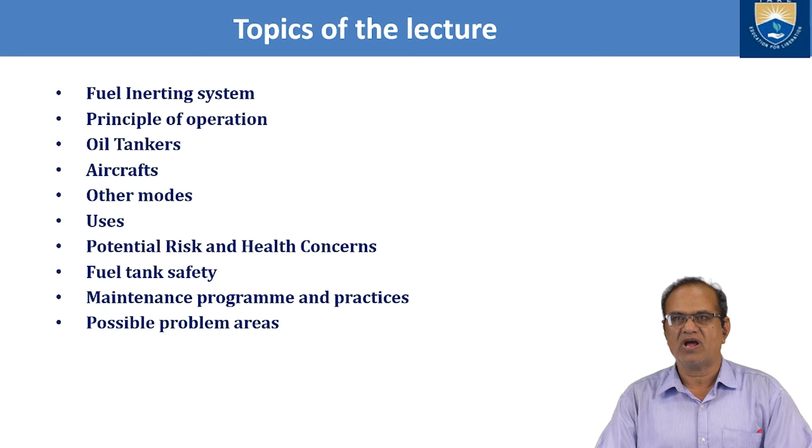In my today's topic, I have the Fuel Inerting System, principles of operation, oil tankers, aircraft, other modes, uses of inerting system, potential risk and health concerns, fuel tank safety, maintenance program and practices, and possible problem areas.

So what is the fuel inerting system? An inerting system decreases the probability of combustion of flammable material stored in a confined space. The most common such system is a fuel tank containing a combustible liquid such as gasoline, diesel fuel, aviation fuel, jet fuel or rocket propellant. After being fully filled and during use, there is a space above the fuel called the ullage. Ullage or head space is the unfilled space in the container, particularly with liquid.

So what is the ullage? If you see, this is the tank here, and here is your filling point, and if you are filled up to here, this part which is filled with air is called the ullage. This space is the ullage or the head space, the unfilled space in a container, particularly with liquid, and here is your fuel.

So that contains evaporated fuel mixed with air, which contains the oxygen necessary for combustion. Under the right condition, this mixture can ignite, and an inerting system replaces the air with inert gas such as nitrogen, which cannot support the combustion.

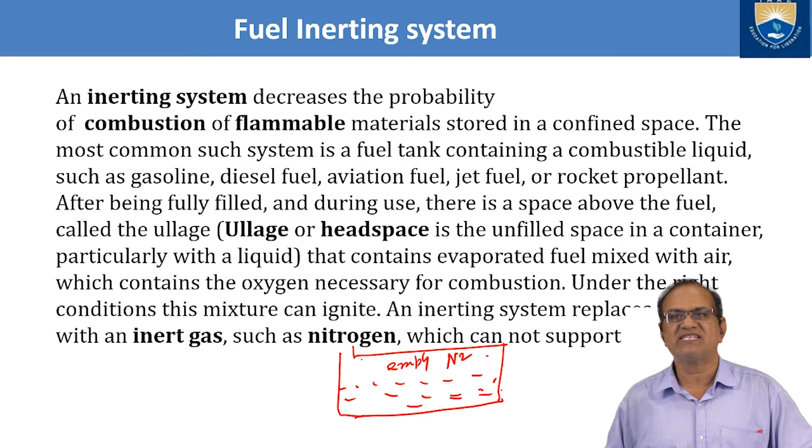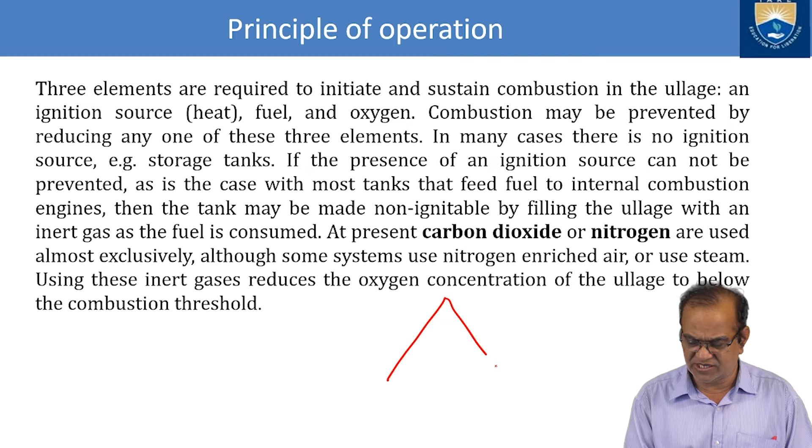So principle of operation: we know that there are three elements required to initiate and sustain combustion in the ullage, fuel, oxygen and ignition source. If you see, it is called the fire triangle. First we need heat, then we need oxygen, O2, and then we need the fuel or any combustible material. Combustion may be prevented by reducing any one of these three elements.

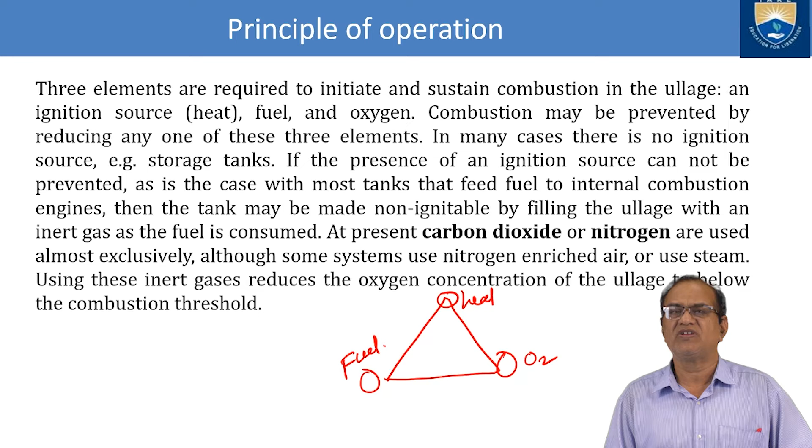In many cases, such as a storage tank, there is no ignition source. If the presence of an ignition source cannot be prevented, as is the case with most tanks that feed fuel to internal combustion engines, then the tank may be made non-ignitable by filling the ullage with an inert gas as the fuel is consumed.

At present, carbon dioxide or nitrogen gas is used almost exclusively, although some systems use nitrogen enriched air or steam. Nitrogen enriched air means the oxygen quantity is reduced, or we can use hot steam. Using these inert gases reduces the oxygen concentration of the ullage to below the combustion threshold.

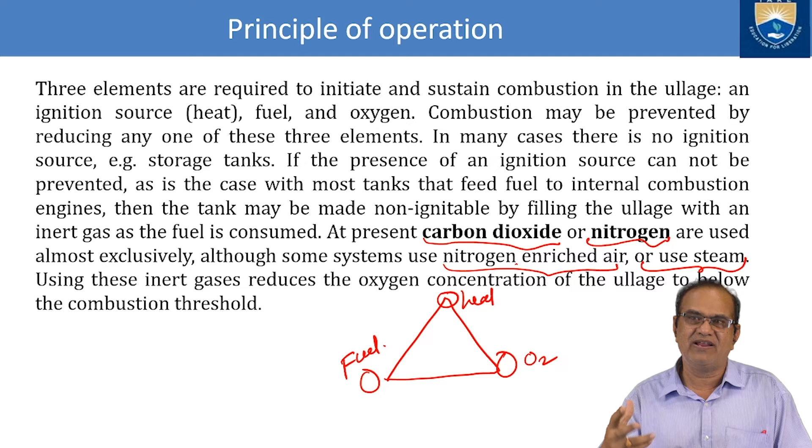So for combustion, we need a sufficient amount of oxygen. If we can reduce this amount of oxygen, or increase the concentration of nitrogen in the air in place of oxygen, then we can stop the fire. Fuel will be there, and we will also try to reduce the heat. If the heat is more than required, then there is a chance of fire.

We have the oil tankers. Oil tankers fill the empty space above the oil cargo with inert gas to prevent fire or explosion of hydrocarbon vapors. Oil vapors cannot burn in air with less than 11% oxygen content, so below 11% it is very difficult to get a fire. The inert gas may be supplied by cooling and scrubbing the flue gas produced by the ship's boiler. Where diesel engines are used, the exhaust gas may contain too much oxygen, so a fuel burning inert gas generator may be installed.

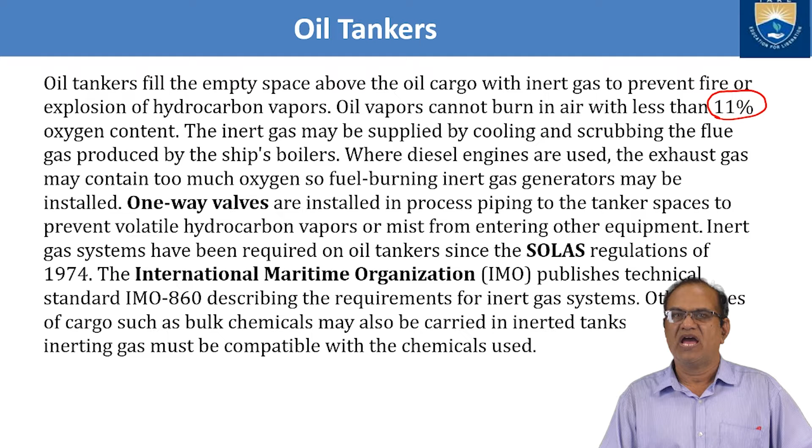Now we have to discuss the aircraft. Fuel tanks for combat aircraft have long been inerted as well as being self-sealing, but those for transport aircraft, both military and civilian, have not, largely due to cost and weight considerations.

Early uses of nitrogen were on the Handley Page Halifax 3 and Halifax 8, Short Stirling and Avro Lincoln B-2, which incorporated an inerting system from around 1944. These aircraft were using inert gases.

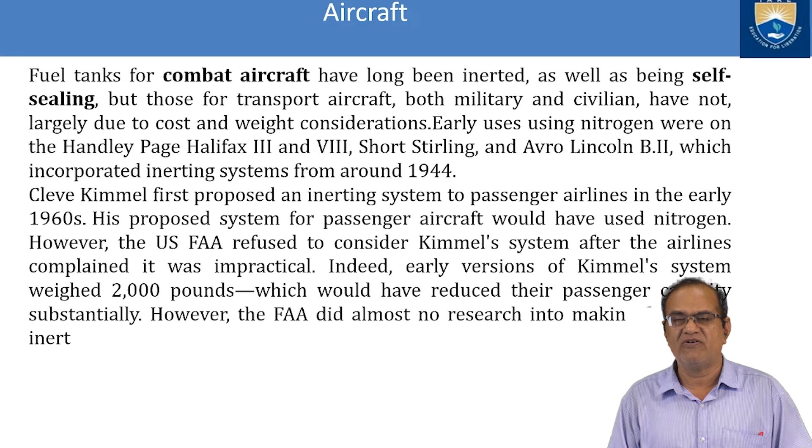Cleve Kimmel first proposed an inerting system for passenger airlines in the early 1960s. His proposed system for passenger aircraft would have used nitrogen. However, the FAA refused to consider Kimmel's system after the airlines complained it was impractical. Indeed, an early version of Kimmel's system weighed 2,000 pounds, which would have reduced passenger capacity substantially. The FAA did almost no research on this issue.

Other methods currently used to inert fuel tanks are the foam suppressant system and the ullage system. The FAA has decided that the added weight of an ullage system makes it impracticable for implementation in aviation. Some US military aircraft still use nitrogen-based foam inerting systems, and some companies ship containers of fuel with an ullage system across rail transportation routes.

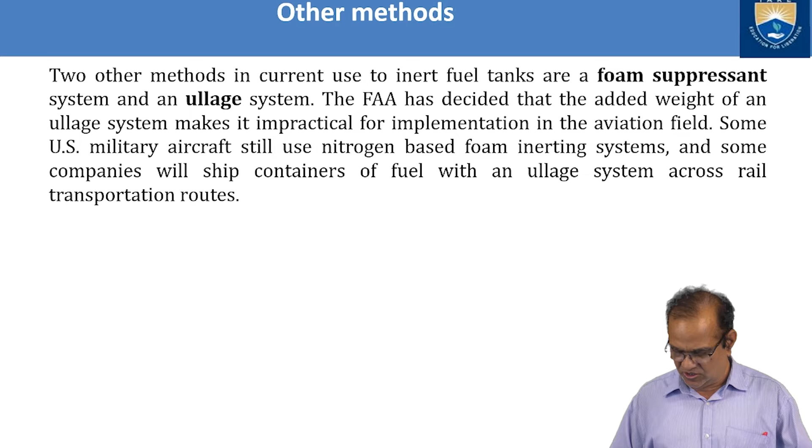What is a fire retardant? What are the chemicals used to retard the propagation of fire? A fire retardant is a substance used to slow down or stop the spread of fire or reduce its intensity. This is commonly accomplished by chemical reactions that reduce the flammability of fuel or delay combustion. Fire retardants may also cool the fuel through physical action or endothermic chemical reaction.

Fire retardants are available as a powder to be mixed with water as firefighting foam, and as fire retardant gels. They are also available as coatings or sprays to be applied to an object. These firefighting foams or fire retarding gels are used to retard fire, reducing its spread and its intensity.

If you look at fire extinguishers, the yellow or amber colored ones are triple F firefighting foam. In those 9 liter or 20 liter firefighting foam extinguishers, a chemical is put inside. This chemical tries to either reduce the oxygen or cover the material, giving a cooling effect, so heat is reduced.

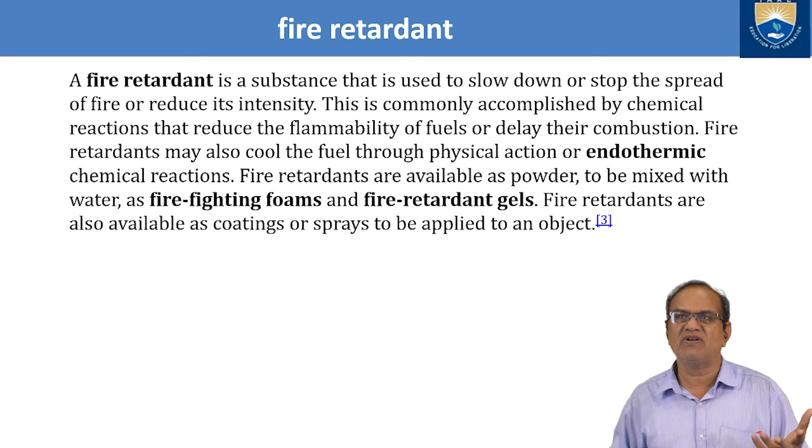The principle of operation of this inert system is: in general, fire retardants reduce the flammability of material by either blocking the fire physically or by initiating a chemical reaction that stops the fire. Through physical action, there are several ways the combustion process can be retarded - by cooling. As shown in the fire triangle, there is heat, oxygen, and fuel.

If you reduce the heat, that means you are cooling. So first is cooling - some chemical reaction actually cools the material down. Whatever foam we are using, if the temperature is 500 degrees centigrade, it will try to reduce it to 400 degrees centigrade. It retards the fire by forming a protective layer that prevents the underlying material from igniting. This layer reduces the oxygen in that area, so the propagation of the flame will be reduced.

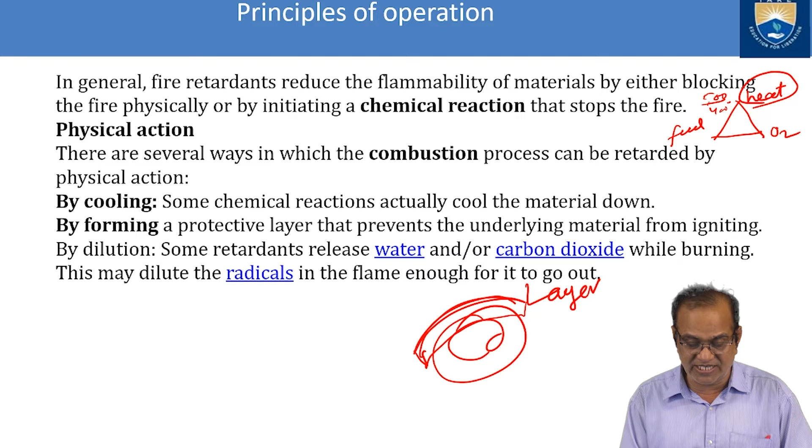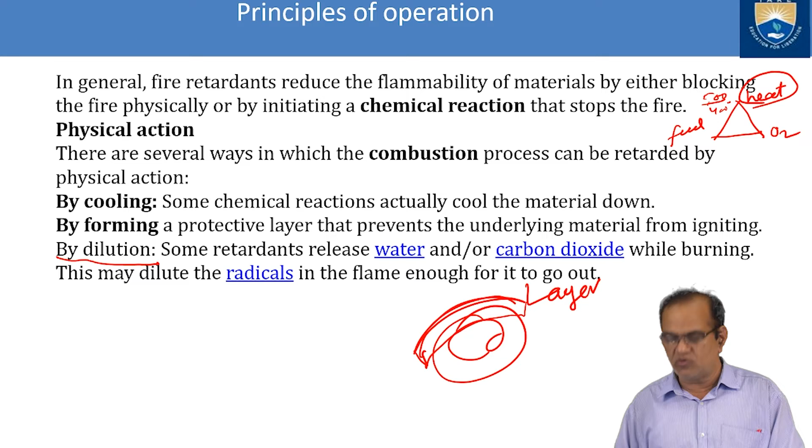By dilution: some retardants release water and/or carbon dioxide while burning. This may dilute the radicals in the flame enough to stop it. So another method is dilution - some chemicals, after burning, evaporate water, and this water and carbon dioxide are both very good retardants that try to retard the acceleration of the fire.

Next is chemical action. Reactions in the gas phase - chemical reactions in the flame - can be interrupted by fire retardants. Generally these retardants are organic halides, haloalkanes such as halon or PhostrEx. The chemicals used in these types of retardants are often toxic.

Reaction in the solid phase: some retardants break down polymers so they melt and flow away from the flame. Although this allows some material to pass certain flammability tests, it is not known whether fire safety is truly improved by the production of flammable plastic droplets. In this process, materials like halon and PhostrEx, which are polymers, also burn, but the rate of burning is reduced as they melt and flow away from the flame.

Next is char formation, or charcoal. For carbon based fuel, solid phase flame retardants cause a layer of carbonaceous char to form on the fuel surface. This char layer is much harder to burn and prevents further burning. So some charcoal, a black colored, very hard substance, is formed on the surface and it tries to extinguish the fire.

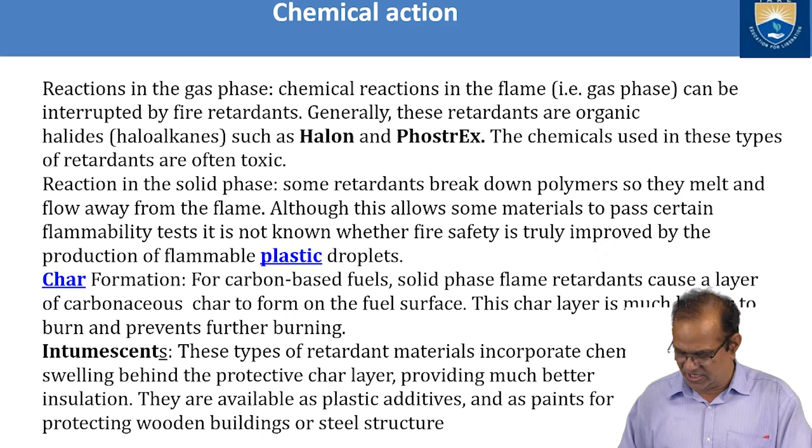They are available as a plastic additive and in paints for protecting wooden buildings or steel structures. Now, what are the uses of this material, the retardant?

We use such material in fire extinguishers. I have shown here a portable fire extinguisher, red in color, with different types of handles. Next is surface coating, forest firefighting, aerial firefighting, and textile. So these are the uses where we use this type of material.

Fire extinguishers, here I am showing a class A fire. This foam is used as a fire retardant in a 2.5 gallon APW and CAFS extinguisher to contain incipient brush fire and grass fires by creating a fire break. It is 2.5 gallons, nearly 9 liters of foam. So it will try to reduce a small fire, bush fire or grass fire.

It can be prevented. Other chemical retardants are capable of rendering class A material and class B fuel non-flammable, and extinguishing class A, class B and some class D fires. So class A, class B and class D are the three types of fire. This type of extinguisher can extinguish by foam. Class A is simple, like your bushes, your leaves and all. Class B is oil fire and all. So like this it is divided.

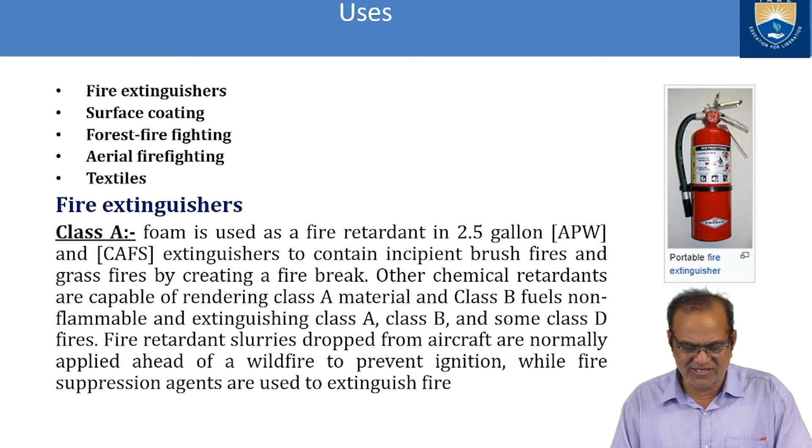Fire retardant slurries dropped from aircraft are normally applied ahead of the wildfire to prevent ignition, while fire suppression agents are used to extinguish the fire.

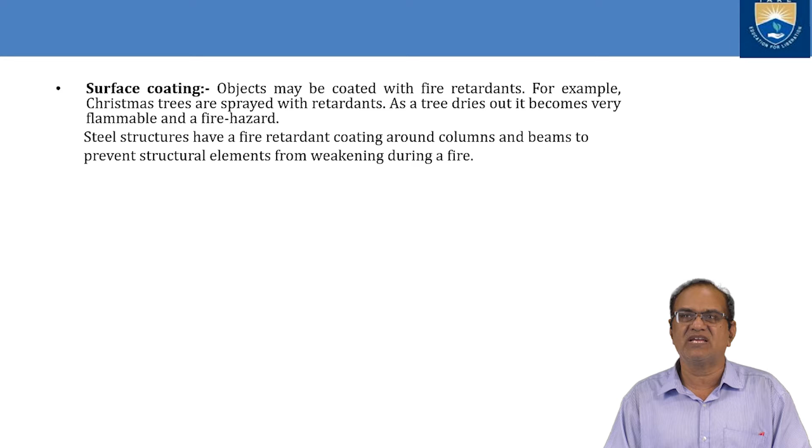So here for surface coating, we have to give some surface coating. Objects may be coated with fire retardant. For example, Christmas trees are sprayed with retardant. As a tree dries out, it becomes very flammable and a fire hazard. Steel structures have a fire retardant coating around columns and beams to prevent structural elements from weakening during a fire.

Next is forest firefighting. How do we do forest firefighting? Early fire retardants were a mixture of water and a thickening agent, and later included borates and ammonium phosphate.

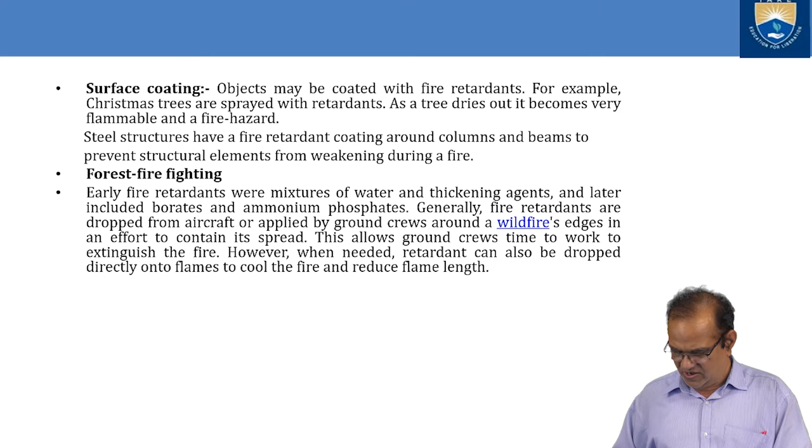Generally, fire retardants are dropped from aircraft or applied by ground crew around wildfire edges in an effort to contain its spread. This allows ground crew time to work to extinguish the fire. However, when needed, retardant can also be dropped directly onto the flame to cool the fire and reduce the flame length.

Aerial firefighting means from the air. How can we do it? Aerial firefighting is a method to combat wildfire using aircraft. This type of aircraft used includes fixed wing aircraft and helicopters, smoke jumpers and rappellers, which are also classified as aerial firefighting, being delivered by parachute from a variety of fixed wing aircraft or rappelling from helicopter. Chemicals used to fight fires may include water enhancer or specially formulated fire retardant.

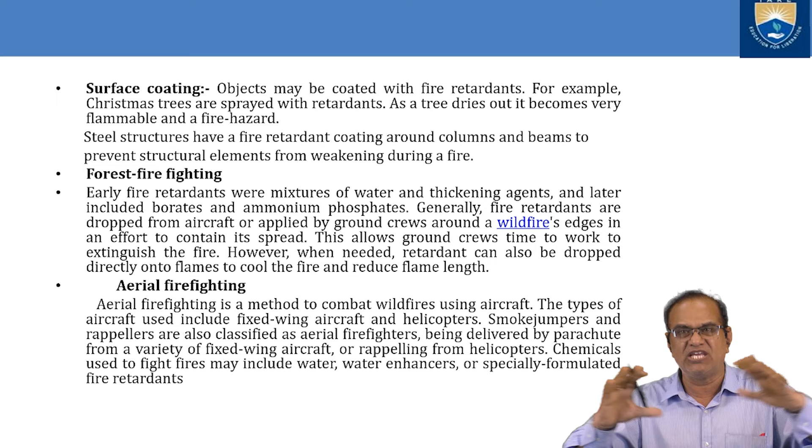So this aerial firefighting can be done by fixed wing aircraft or by rotary wing craft like helicopters. They carry smoke jumpers or other equipment. They can also carry water enhancer and specially formulated chemicals like foams, which are carried in the aircraft and spread at very high pressure. So a very huge area is covered by the particular aircraft.

This you can see here, one diagram of a DC-10 tanker operated by a private contractor for the US Forest Service demonstration, a water drop during thunder over the Empire Air Fest at March Air Reserve Base in 2012. So this is shown here, a simple demonstration of the firefighting, how the water is sprayed and how much area it is covering.

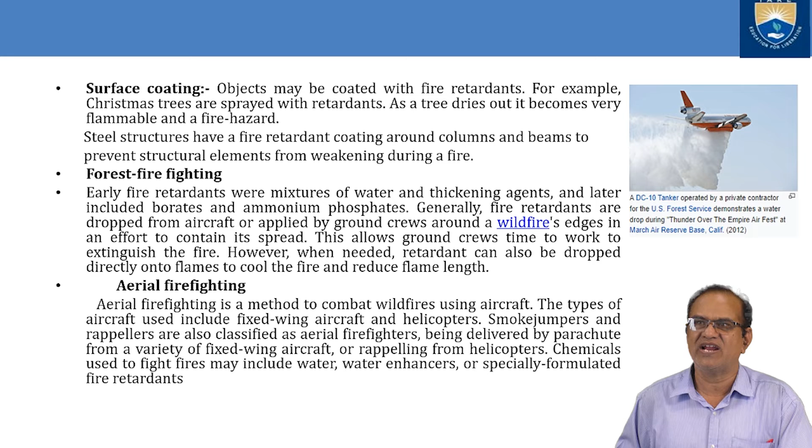Images of aerial firefighting, I can show you here this parachute. This parachute is used, containing water or some chemical, and it is flown. US airmen with the 129th Rescue Wing, California Air National Guard, drop water on the rim fire near Yosemite, CA, August 2013.

If you see here, Kaman K-Max K-1200 used for aerial firefighting. Okay, so this is another one. Here is a Kern County, California Fire Department Bell 205 dropping water during a training exercise at the Mojave Spaceport. Here you can see the Los Angeles County Fire Department Sikorsky S-70C Firehawk during a water drop demonstration at Station 129 in Lancaster, California.

So these are the few things which I have shown here, and this I have taken from this website. It is not mine. So this is the source of this information.

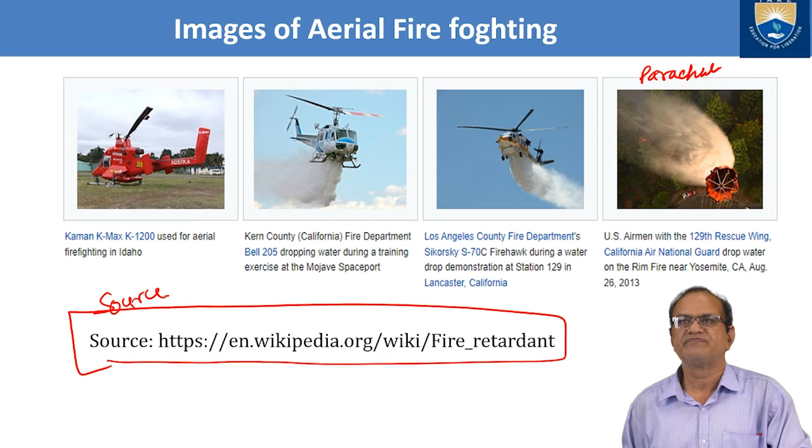Now water bombers. You might have seen bombers putting bullets, ammunition, arms and all. But for a high and jungle fire where a lot of area has to be covered, that time we have to use the water bomber. These are the few aircraft. They carry a huge amount of water.

A consolidated PBY Catalina amphibious flying boat air tanker. It is a flying boat air tanker, carrying a lot of water which it will spray. And Italian Canadair CL415 at work, so how it is, it is throwing water.

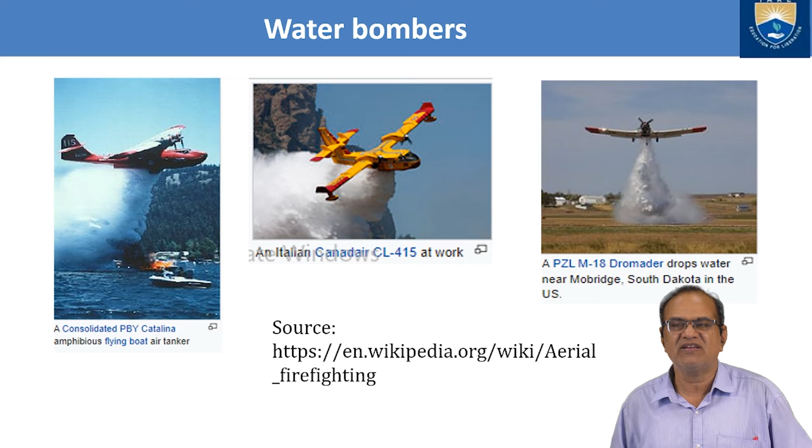And next is the PZL M-18 Dromader dropping water near Mobridge, South Dakota in the US. So these are the few images showing how aircraft are used for firefighting of the area.

Now potential risk and health concern, because if we use this inert system, this is not good for health. Humans working nearby may get injuries or serious problems. Most chemical fire retardants are organic halides, haloalkanes such as Halon and PhostrEx, which are proven to be toxic.

During the 1980s, the most commonly used fire retardant material was pentabromo-diphenyl ether. It was banned by the government due to potential health and environmental concerns. It was then replaced by chlorinated tris, chloroalkyl phosphates, halogenated aryl ester, and tetrabromophthalate diol diester, which later were proven by an EPA study to contain mutagens that could be absorbed into children's bodies.

Now study has shown that a small percentage of the population may have allergy towards the chemical substance used as a fire retardant. Studies also have shown that a drop of retardant chemical directly into a stream may cause sufficient ammonia concentration in the water, which is lethal to fish and other aquatic organisms. If the amount is large enough, it is likely to lead to lethal consequences for humans.

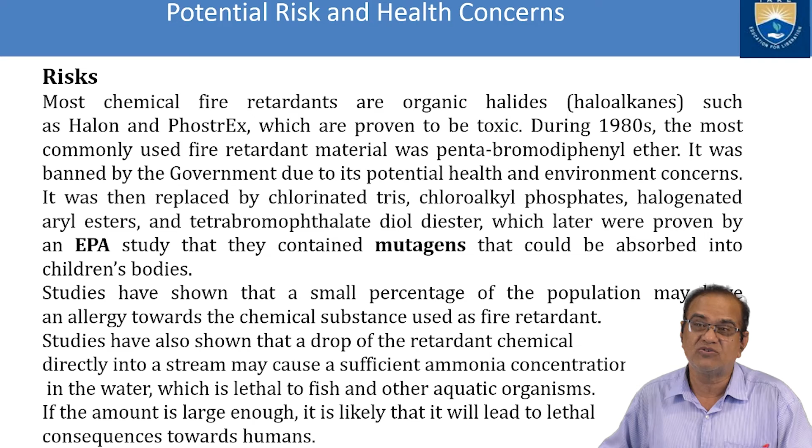This ammonia and these things we are using may be very dangerous for some people. It may be very allergic, so we have to make sure that people should not suffer. So health concern, I am talking here.

Long-term exposure to these chemicals is likely to develop cancer, especially for firefighters, and potential contamination towards the environment is another safety concern. Many of these chemicals are now recognized as global contaminants and are associated with adverse health effects in animals and humans, including endocrine and thyroid disruption, immunotoxicity, reproductive toxicity.

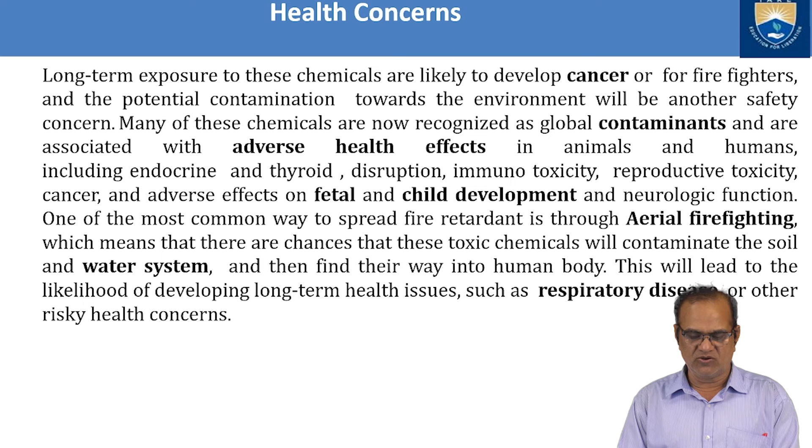One of the most common ways to spread the retardant is through aerial firefighting, which means these toxic chemicals will contaminate soil and water systems and then find their way to the human body. This will lead to the likelihood of developing long-term health issues such as respiratory disease or other risky health concerns.

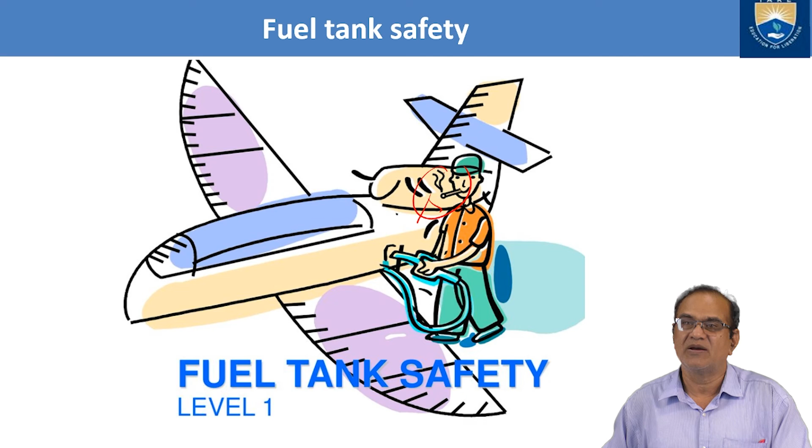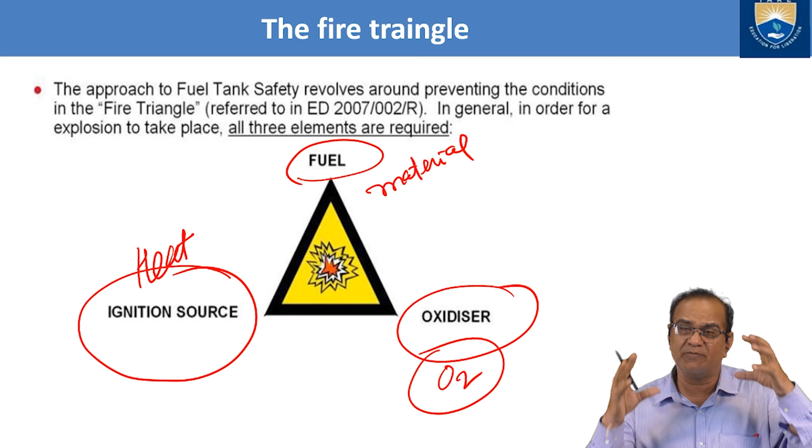The fire triangle - I have discussed this before. The approach to fuel tank safety revolves around preventing the conditions in the fire triangle. In general, for an explosion to take place, all three elements are required: fuel, oxidizer, and ignition source or heat. This is the burning material and this is the oxygen. If you have these three things in proper quantity, fire or explosion will take place.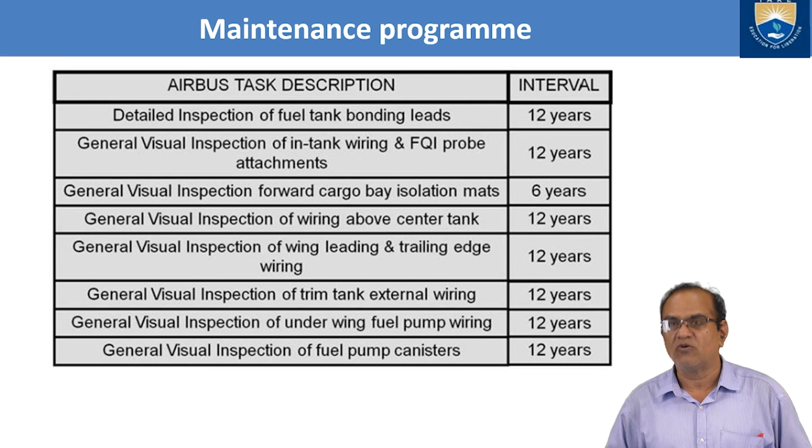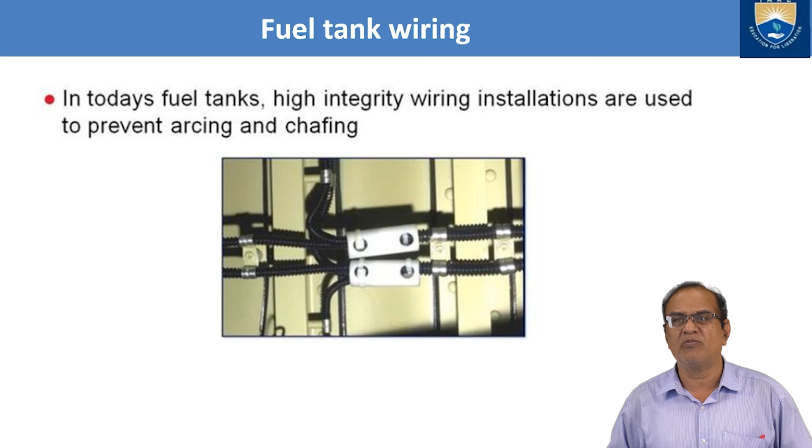So maintenance program - we have to take some maintenance program for different types of aircraft. Here we have Airbus maintenance, 12 years, and different types of maintenance and practices shown here. Fuel tank wiring has to be done very nicely. There should not be any short circuit or similar issues - we have to make sure it is done properly.

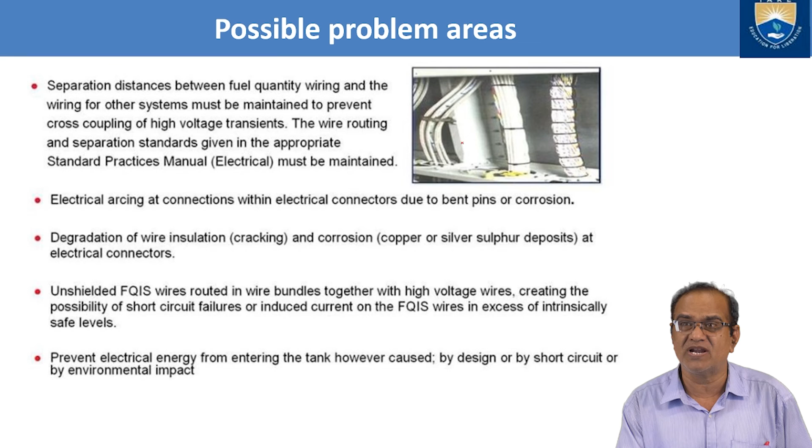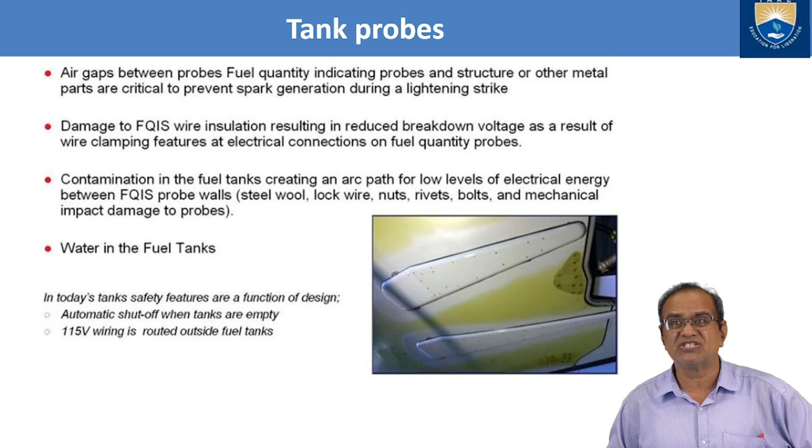Possible problem areas - what are the different areas that give problems? The insulation of the wire, if not done properly, will create some problem. Wiring harnesses, if broken, will also create issues. So during maintenance, we have to make sure all these things are done properly. Tank probes - if there is any misalignment or electric short circuit, this may happen. Bonding problem areas - electrical short circuits or earthing should be done properly.